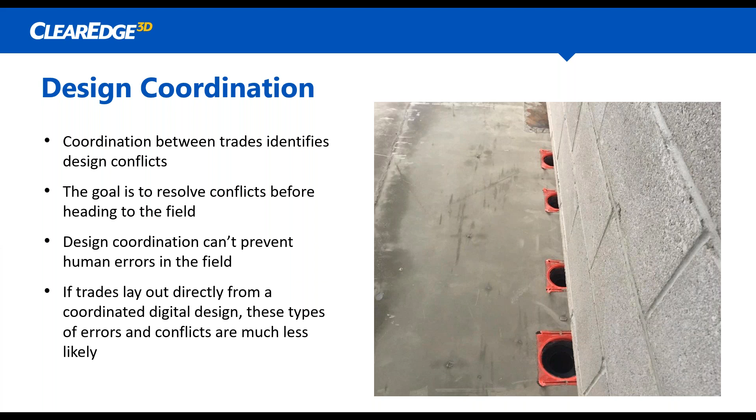Well, in this case, the wall and the MEP contractor could both be right, but if neither has a deviation report, they're just going to end up blaming each other. So, unfortunately, if you're not using a robotic total station, you don't always have the proof to back up your work to the GC. But when you are using a robotic total station, the proof is in the as-built and the deviation report that the tool creates.

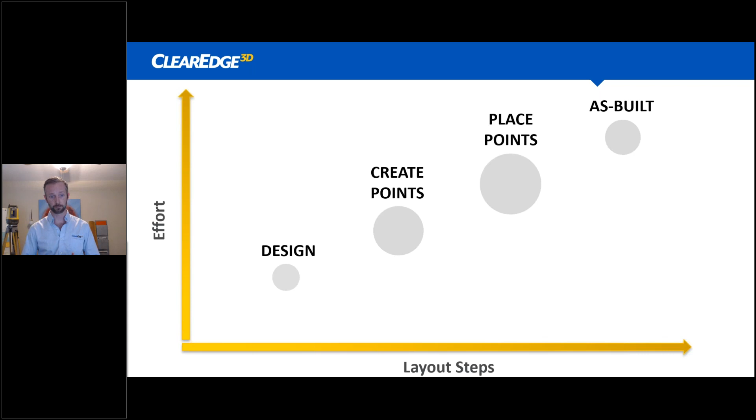I think what we're going to focus on is how we can have a simple, seamless workflow to reduce our risk for these highly frequent items, and also protect ourselves and our clients. Many times the workflows are very departed or fragmented from each other, and we're going to talk about how that can become more seamless. Then at the end, we'll talk about stepping it up a notch with some of ClearEdge's products.

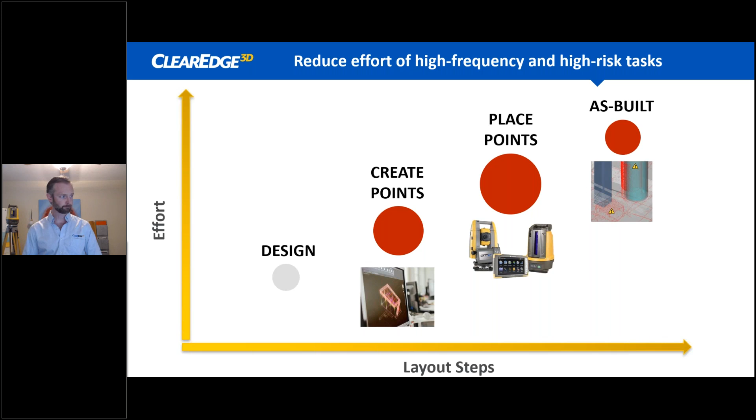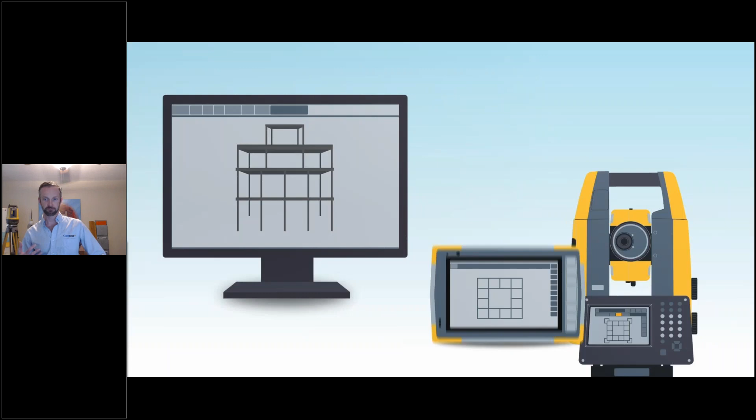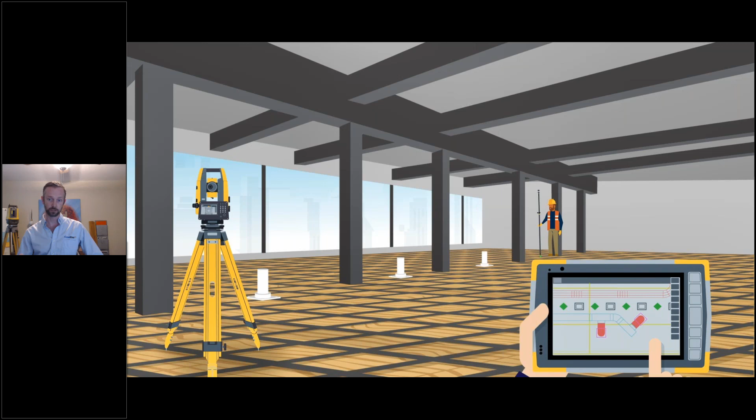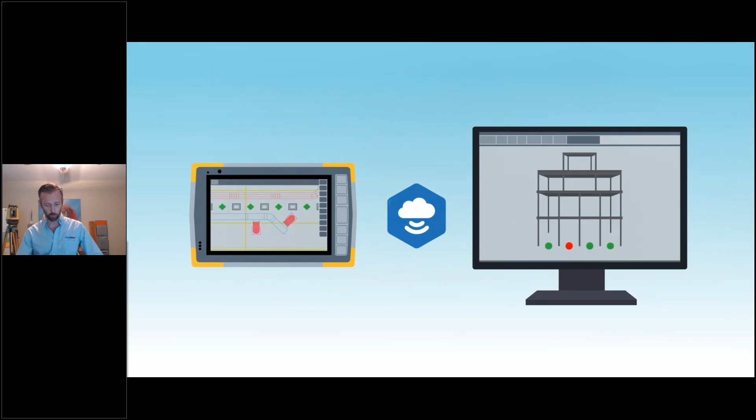Topcon has done a great job focusing on a new tool called Point Manager that automatically does point creation in a very smart way, pushes that to the cloud, and then you can perform layout in the field literally 5 times faster and guide yourself to where you're going. Passively, it's collecting as-built information, and you can push that back through the cloud to the desktop. So if there's someone doing point creation in your office, or it can be you, you can always have that data automated or updated to understand if there's an issue.

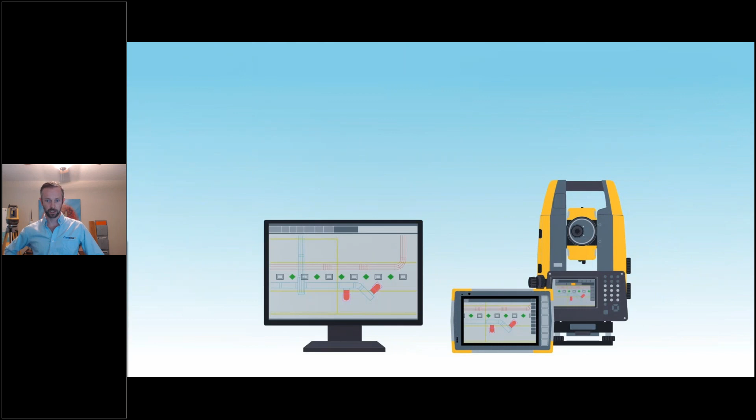And if you really want to take that even farther, you can use tools like Verity or Rithm to really step up the level of accountability on your job.

So prepping for layout, guys, sometimes just saying these words can make some people cringe because they think it's going to be a very long and tedious process. But what I'm going to show you are some of the tools we can use to take some of that pain away when it comes to prepping for layout.

The first step in the workflow is prepping your data for layout using Topcon's Point Manager plugin for AutoCAD or Revit. Point Manager is used to format point data for your layout device, where Magnet Layout is the application used to actually lay out your points. In Magnet Layout, you can also create points, view your plans in 2D or 3D, and run several reports, including a deviation report. So after you're done prepping your data with Point Manager, you send it over to Magnet Layout.

Just a little bit more on Point Manager, because it's a very important step in the process. How we build hasn't really changed much, but the tools available to help us get the project done quicker certainly have. Point Manager is really the most efficient way to export point files and background drawings to your layout device. And as you all know, not all field workers have the same experience and abilities reading construction plans, so it's very beneficial to simplify the information we're sending out to the field.

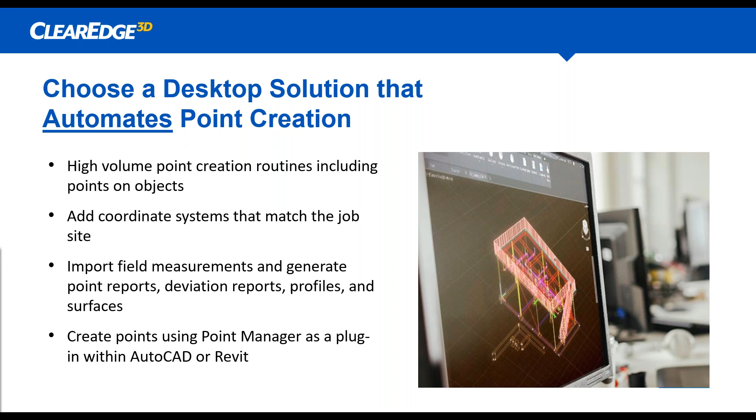As mentioned, Point Manager is a plugin that works for either AutoCAD or Revit. Here's how it works: in Point Manager, you would pick maybe a sleeve in the drawing, and whatever symbol you used in the drawing for sleeves, the program recognizes that and asks where you want it to create a point on that sleeve. You might say the center of the sleeve, and it then runs through the project and pulls out all of those sleeves.

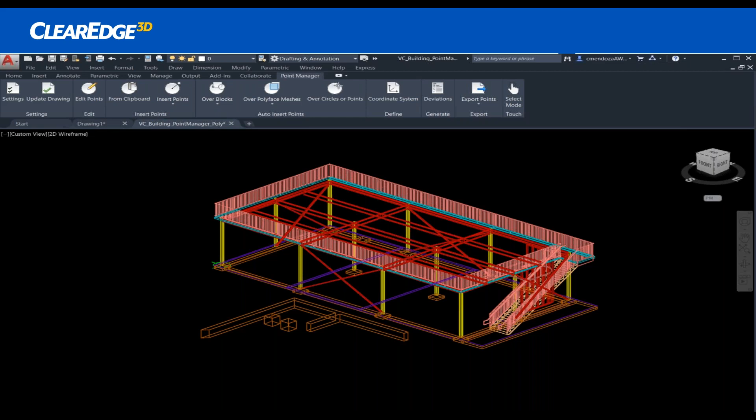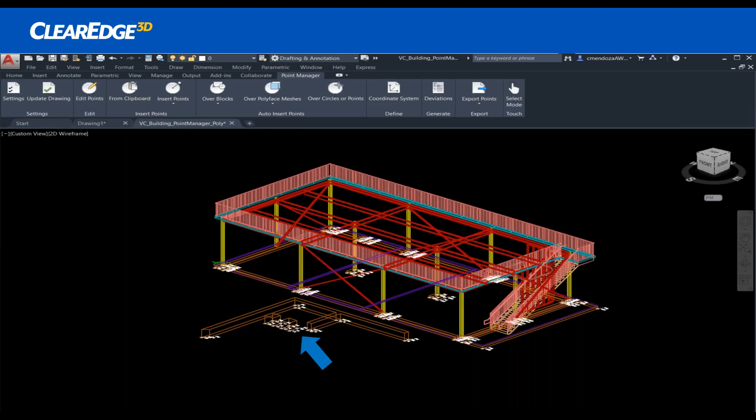You can do the same thing for anything, for example hangers. All you're doing is identifying objects in that drawing, say go, and it automatically pulls out all those points. Now you have your drawing and all of your points, which you then upload into the controller or the data collector, which runs on Magnet Layout.

I just went over some of the benefits of Point Manager, but the whole goal is to remove as much pain and include as much automation as we can. Using Point Manager, you're able to reduce the time and cost of your construction layout, avoid construction errors and rework, improve field productivity, and simplify the whole BIM to field process.

After you're done with Point Manager and you've got all your points out of there, the next step is to send the points to the field so you can start laying out. There's a couple ways of doing that: you can either manually upload those points to your layout instrument or data collector, or you can take advantage of Magnet Enterprise's cloud transfer.

So there's a few different ways of getting that information over there. The easiest tends to be the cloud transfer.

One thing to note as best practice, no matter the software you're using, is you really want to do as good of a job as you can with classifying what your points are, both for yourself and for your adjacent work and users.

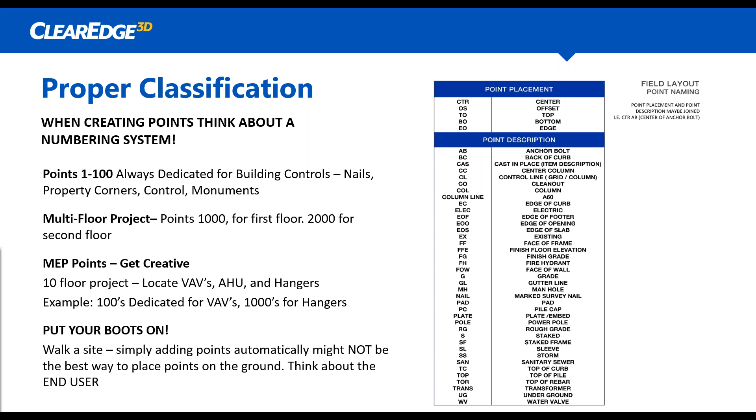So if you're sharing a magnet field project with other subcontractors doing MEP work, thinking about placing hangers, etc., by classifying these things, not only do you know what they are, but on the next slide you can filter and look at this data on your field collector, and within magnet field you can color code and turn layers on and off.

So you're just focusing on what you're doing for that day. That is, again, best practice in general, but that capability does exist within the integration between Point Manager and then into magnet layout.

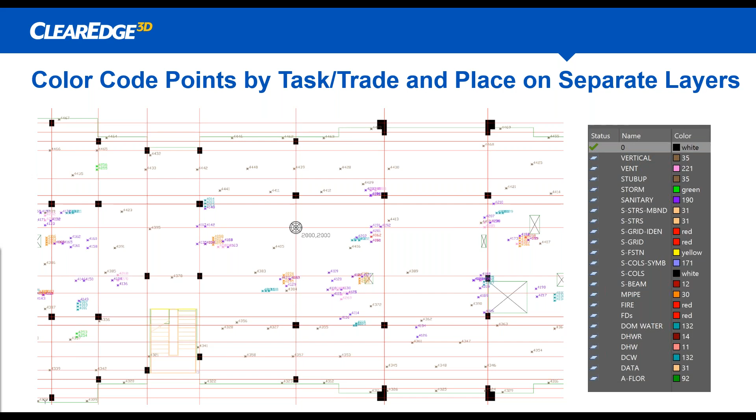Next slide. I think another really important thing to think about is that you don't need to dimension your drawings. Now, a lot of people will smirk, including myself. I worked out in the field, and yes, depending on who's consuming the data, they will need dimensions.

But if you have a robotic total station and that user has a field controller, you just export your points out of Point Manager, because they're referencing from those digital documents, whether it's a Revit model, AutoCAD, or a DXF file that's being consumed.

So you have to think a lot about where your time is being spent, because profit margins on jobs are already low, and the speed of jobs has just exponentially grown. So we have to really think about where our time is being spent.

A really great part with Point Manager is you just don't need to do that dimensioning. And if you want, you can always pull dimensions within your field controller.

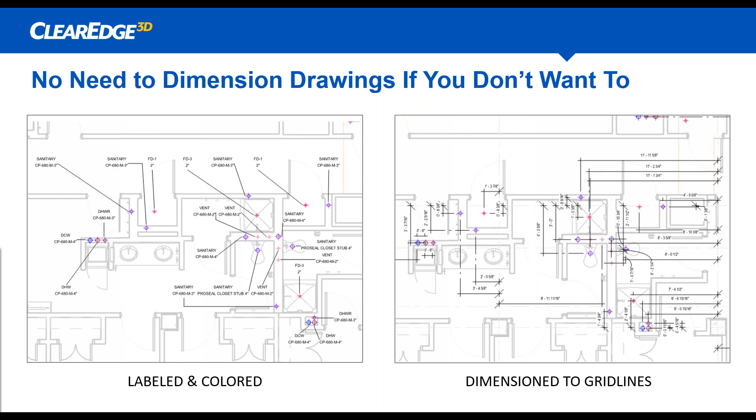Yep, and thanks for that, James. Essentially, when you compare all these point creation softwares that are out there, Point Manager typically gives you the most bang for your buck. It's really the most cost-efficient software currently on the market.

And while it is geared towards brand new users, you can make this as simple or as robust as you need it to be. On top of that, all of the GTV kits provided by Topcon include Point Manager, so you're not going to have to worry about buying a license on top of the instrument to accomplish this workflow.

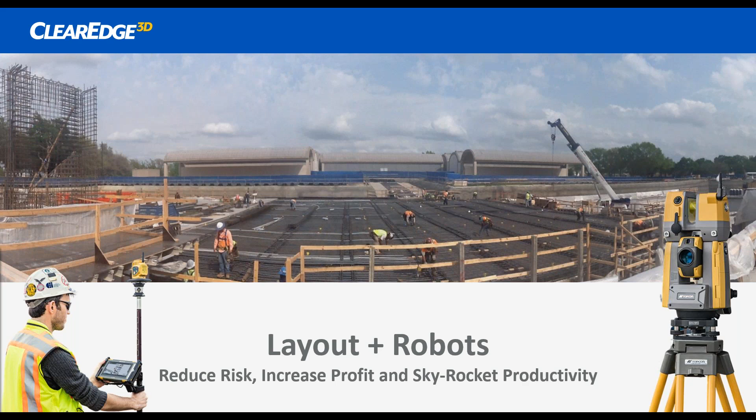So we've kind of gone over Point Manager. Let's talk about laying out and then some of the robots and instruments that are used to do that. So far we've gone over how to use Point Manager and then export those point files and background drawings to your layout device.

Now I'm going to cover how we can set up anywhere, and you can actually start laying out those points. I'm going to run you through setting up anywhere step by step, just to show you guys how easy it is.

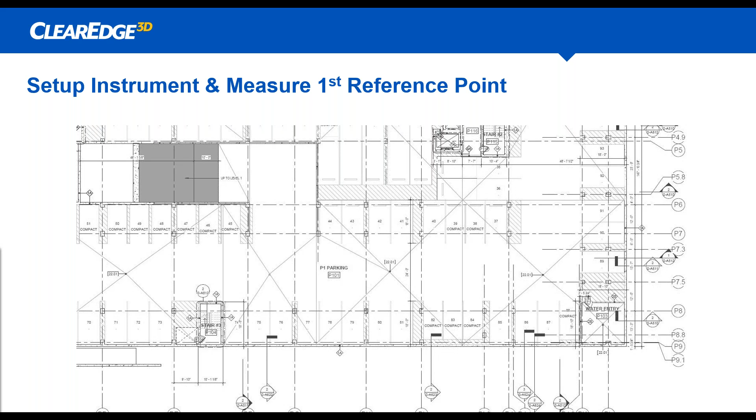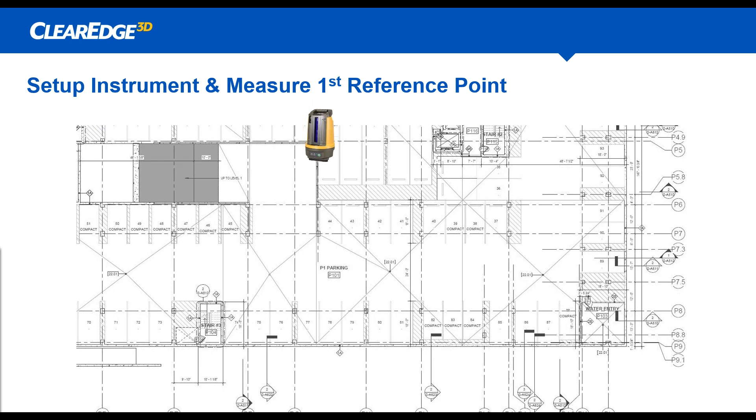So the first thing you're going to do is pick a place on the job site with a decent vantage point for what we want to lay out. The second step is taking that pole prism to a second point, which can be your edge of slab, a column intersection, doesn't matter, and you're going to shoot that point.

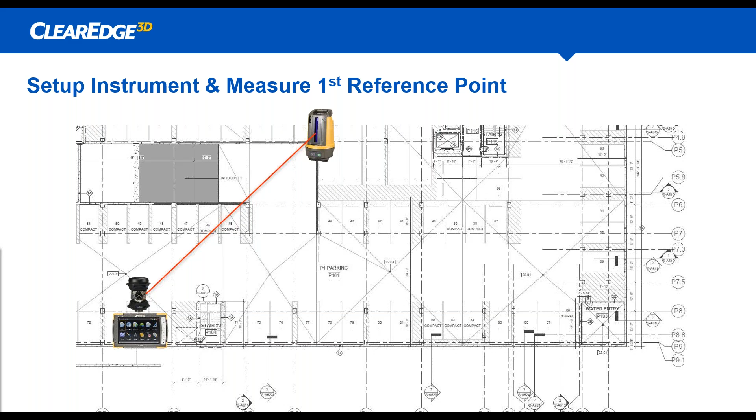The third step is you're going to repeat what you just did. So when you shoot that second point, it's going to back calculate its position, and now the instrument knows exactly where it's at on that job site.

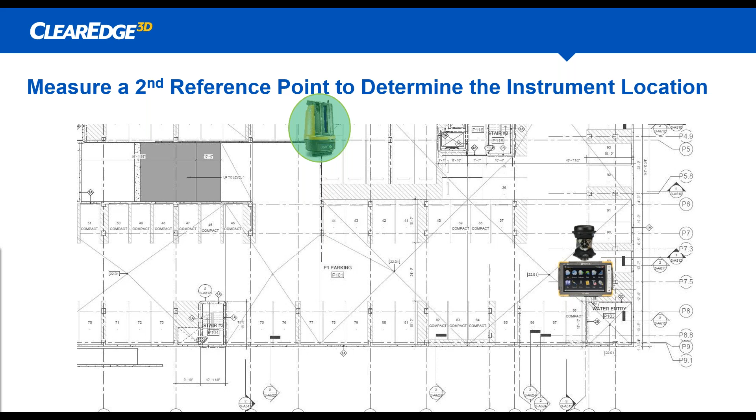Furthermore, the instrument's going to tell you if you're accurate, saying okay, based off of those 2 points, everything you shoot will be within 1/8 of an inch, 1/16 of an inch, etc. Finally, you're going to pick a point to lay out, and the instrument is going to tell you to move in that direction.

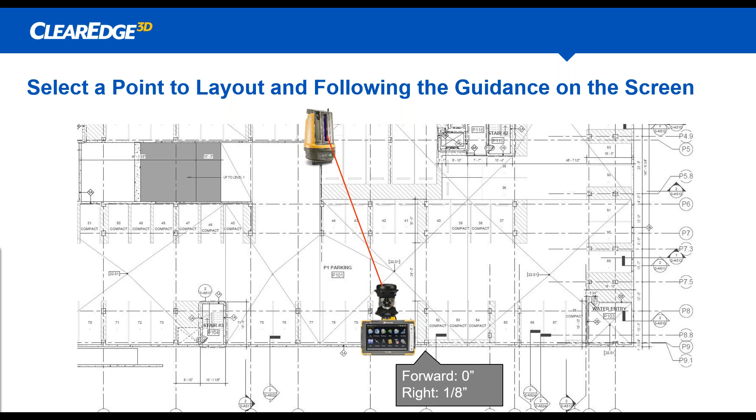When you're close enough, you're going to mark it and shoot that point. What that's going to do is store the position as being shot and automatically create an as-built in the background. So you just do the same thing for the rest of your points. It's really that easy to go from your drawing in AutoCAD or Revit to Point Manager to laying out your points in the field.

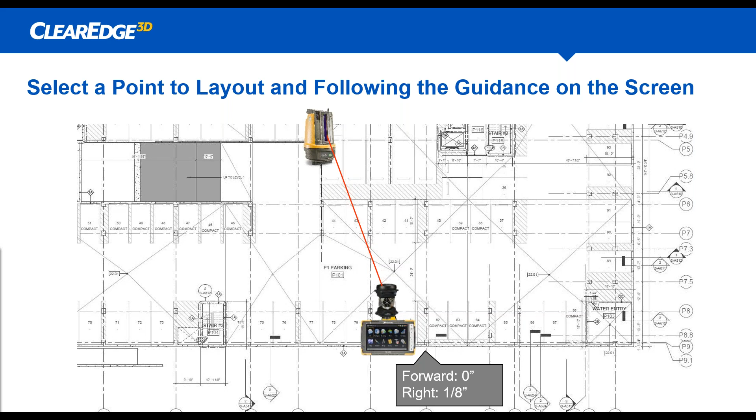Layout is significantly faster with just one guy and a robotic total station, versus your standard layout crew of 3 people and a tape measure. This is going to reduce human error and help installers by laying out ahead of time, which speeds up installation. People typically see layout costs reduced by about 50% with the labor and time savings incurred. As I mentioned, it also runs like an as-built in the background and provides a deviation report, which is also especially useful to back up your work in the end.

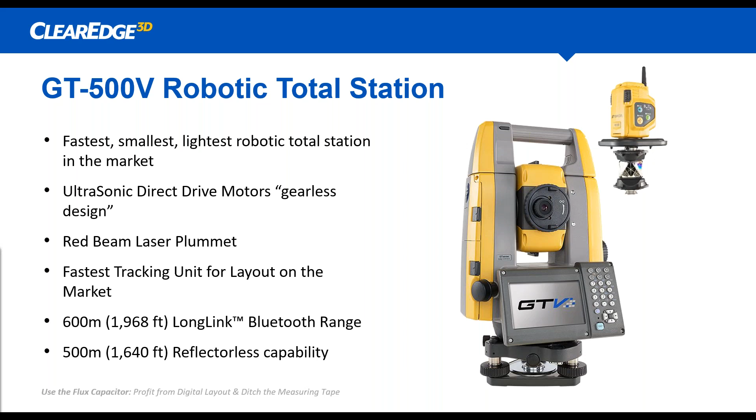I think that's definitely something to take note of when you're thinking about production and how many points you're going to place, and how to keep your people efficient, safe, and also have the ability to get off the deck as fast as possible.

And the little brother, I'd be doing everyone a disservice if I didn't speak about it. It's also a fully robotic total station. It has about 430 feet of range. It's a little bit limited in its vertical scope and range, but it does have an extremely low entry cost.

So a lot of companies will start off with an LN150, realize they might need something bigger and faster for the larger projects they're working on, and then they'll add a GT, the big brother, as well. The LN150 is really good for smaller projects like multi-residential or strip malls, where you're not going to be shooting from very far away. But again, both are fully robotic total stations.

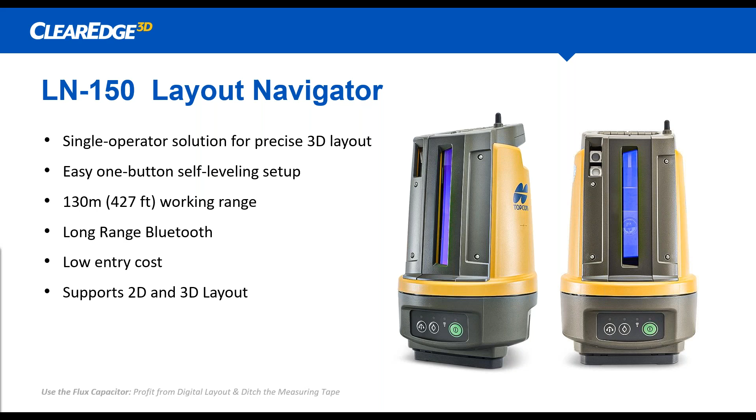And it's a great instrument for having a mixed fleet for different types of projects. I'll pass it over to James to speak about the as-builts. So we can just move on to the next slide to talk about what these are. Let me actually move one more slide. Frankly, we'll just move on.

A big thing is that we spend all this money and time designing our buildings in 3D or even in 2D and CAD. Then we do 3D coordination or basic coordination before the job starts. You're redlining drawings and spending all this money and management time to ensure the building will be built properly before the shovel hits the dirt. But even with the best of intentions, that just does not occur. There's human error involved, and things get placed in the wrong location.

So I think what's very important is to have the proper tools to protect the user from placing things in the wrong location, or to at least let them know proactively what's wrong. And if something has been installed inappropriately, they have a way of holding themselves or someone else accountable, because what you don't want to face is not knowing why something's wrong.

Then there's a change order, and if you're a sub, you'll end up paying for that problem. Or if you're a surveyor, same thing, you can be held accountable. There's insurance, there's all these things that play into our businesses, and we're trying to erode as much of that profit burn as we possibly can. And that can only really occur by having accountability.

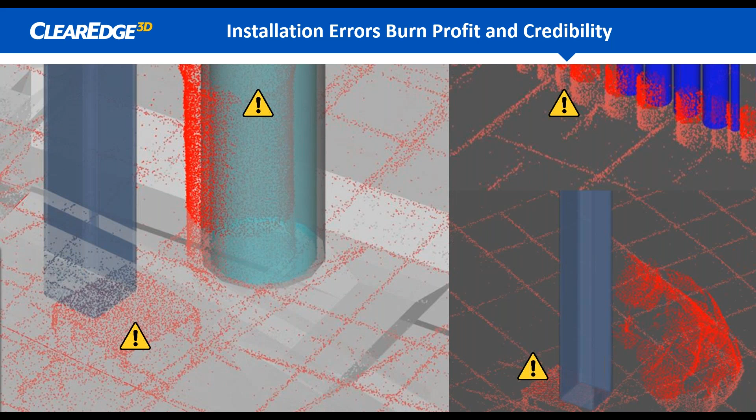So next slide. A really nice feature that's simple is every time you're shooting in points that you're going to place, it's automatically taking that point, and you at least have documentation to say, hey, I put this hanger here, it's time stamped, whatever. If I placed the outline for this steel column here, and it gets placed wrong, you at least have documentation to go back to and say, this is what happened when. And that's also very good best practice if there's an RFI. It's a good way to defend yourself, or at least know what's going on in your job.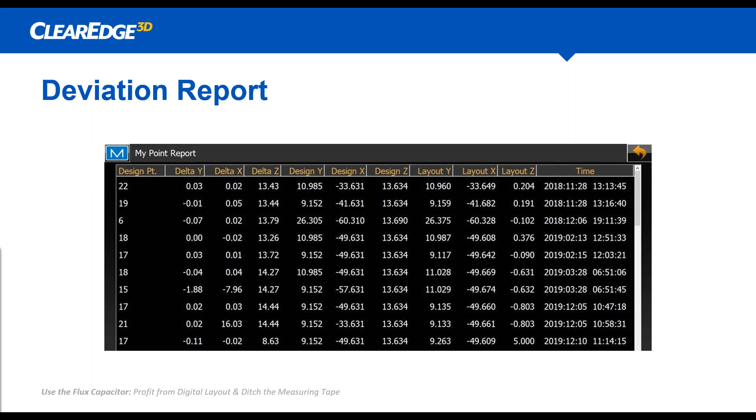Now, if you want to step it up a notch, next slide, think about this conversation we had about the millions of dollars that are invested for modeling and 3D coordination, just for things to be installed wrong. It's frustrating. I can't imagine the amount of times I've heard, well, what's the ROI on your modeling efforts or your 3D coordination efforts? It's very hard to defend that when work is getting installed inappropriately on the job. And the thing is, no one's trying to do their job the wrong way. Things just happen. So the question is, how can we protect them and ourselves from those things occurring?

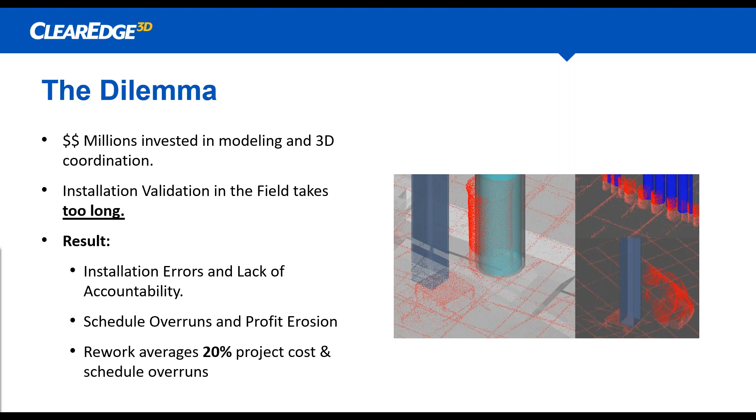And that's where I think the next slide comes in, that we have with ClearEdge. We created a tool called Verity, and effectively, if you power it, if you tie this to a new robot, the GTL. So the GTL is a GT series robotic total station with a laser scanner on top of it.

And it's a 360 laser scanner. It's not just scanning a small area, it can do a full dome scan. You can also focus it in on a certain area that you want.

And we've tuned our software to work with the scanner, which is awesome. We've actually tuned it with all of our different products, and the data is extremely clean, which is important. It's not noisy, which matters a lot for those who do scanning and know about that.

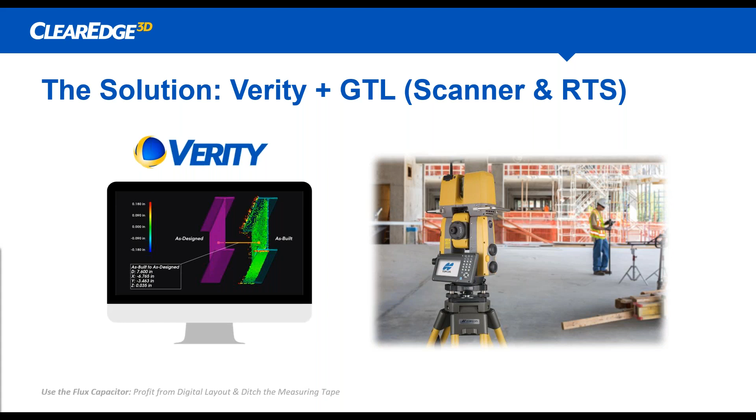And you can kind of see here that we have this as the design location, and then where it actually was placed was in a totally different location, right? And the benefit is, if you know this, you can publish that information to Procore or to Autodesk 360, or just print out PDFs.

I think what's critical is that if we think about our existing workflows, what do we do now? Well, what we do now is we own a robotic total station, and then we have a laser scanner. If you think about a person working on a high rise, as it's getting built, that person has to carry all of that equipment up and down, or leave it in their lockbox or their Joe box.

But there's still a lot of carrying of things. The decks are always moving, someone knocks over your instrument and you're hosed. And you're also having to learn how to use two separate instruments. Thinking about the training and support involved in expecting someone to be an expert at both using a total station and being an expert at scanning, with separate instruments, it's exponentially harder. It's not that it's not possible, but it takes a special kind of person.

And when we think about building construction, whether it's horizontal or vertical construction markets, resources are slim and or scarce, and finding those kinds of people is even more scarce. So when you're trying to think about how we can lose less money on our job, we're going to do this thing with another scanner.

I think another really important thing to note is that you can change the parameters of what's considered installed correctly or incorrectly. Because the tolerances for steel are different than the tolerances for maybe ductwork. Duct still matters because it takes up a lot of plenum space, but maybe you say if it's off by a half inch I'm concerned, whereas with a steel column it may be like an eighth of an inch or a sixteenth of an inch, depending on what's getting connected to it. And these are just really good ways to know what's going on in the project.

And then again, this data gets published directly to Procore or to 360 Field from Autodesk, or you can just export out an HTML file to send to anybody, or now PDFs, which matters a lot, right?

We implemented this on a job years ago, and I think by having these inspections, we went from an average of like 600 errors down to like 67 or something on the next dorm of the same kind of project. I think what that means is that when you have real time or visual accountability, you can really hone in on the problems of your job, and then that allows you to do your lean planning and scheduling and not have mess ups that really blow your schedule up, or the process you're trying to implement.

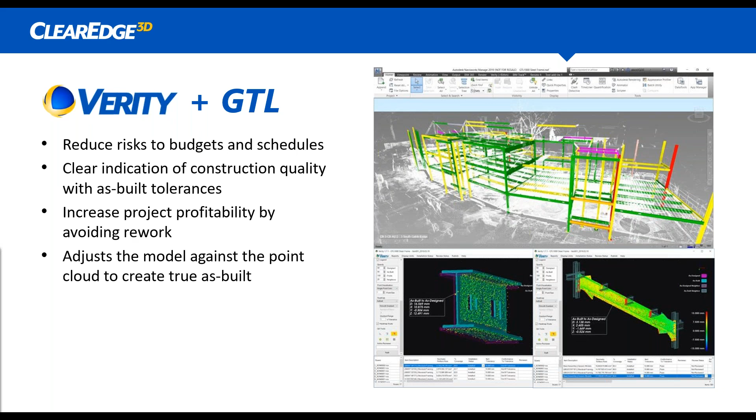Next slide. At the same time, we also have Rithm, and we've been working a lot on optimizing that, especially this past year. I think when we think about repetitive work, we were talking about how do we reduce the amount of resource load for different types of tasks. So building is one of them.

Well, Rithm and floor flatness analysis is another. When I was working, we had to walk every 5 feet on a deck for a high rise to do a grid of points and say we're not concerned about this floor, it's flat enough. It matters even more with a parking deck about what your slopes are—you don't want ponding on your jobs, for instance. And then if you go to data centers or arenas or places that require super flat floors, you have the ability to run an ASTM 1155 report within the software.

So you can use two birds for one stone. You can use Rithm for these very high profile jobs that require super flat floors. It also works—you can run it if you're using a GLS, you can hit wet concrete and run this while concrete's getting poured, or you can just use it as a floor flatness generic tool on a general high-rise project, or anywhere you have to check floor flatness.

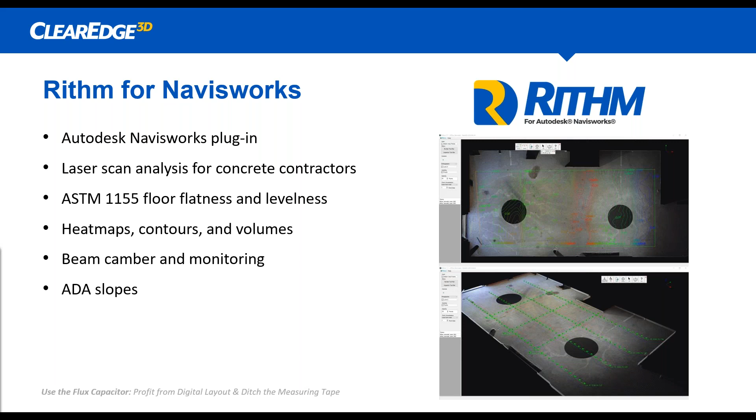Next slide. What that leads us to is that we're trying to identify these pains that have the highest frequency of occurring. So if we can automate point creation, that's step one in the office. Step two, we can place those points and be confident where they're going and be productive with that. Step three, we can really ramp up and amp up the verification process, so we can protect our profits and know what is good or bad about our jobs.

I think that's really been where we're honing in between TopCon and ClearEdge, is keeping that as simple and as elegant as we possibly can. And that's really it.

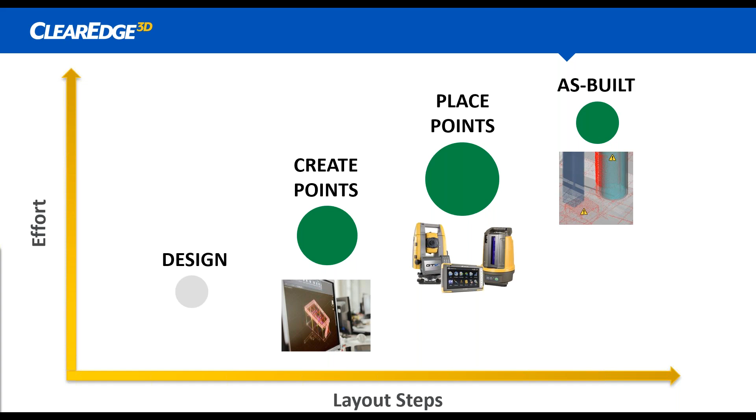Yeah, absolutely. I think we thought this was going to last a little bit longer, but I guess being short is better than being over for your guys' time's sake. But if you guys have any questions, feel free to enter them in the chat box and we'll get right back to you.

We have answered a couple. Will this work with the TopCon? So David, yes, it will work with the GLS 2000. Yes, absolutely. If that means Verity and Rithm and Edgewise, yes. Same goes for the GTL.